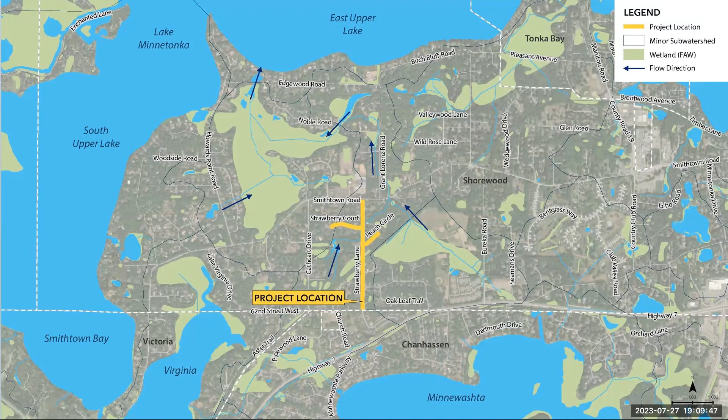The project itself is located within the city of Shorewood, and it extends south from West 62nd Street north to Smithtown Road, crossing the Lake Minnetonka Regional Trail at the approximate midpoint of the project. Project areas north of the trail are referred to as Strawberry Lane North, and areas south of the trail are referred to as Strawberry Lane South.

Drainage in the Strawberry Lane North area includes approximately 45 acres of land west of Strawberry Lane and north of the Lake Minnetonka Regional Trail. Within this area, there are two existing stormwater management facilities located on the west side of Strawberry Lane, on the northwest and southwest side of the intersection of Strawberry Court and Strawberry Lane. Water from this area drains to these basins, and from those ponds, water then discharges east via a 12-inch pipe into Pebble Creek.

During large storm events, runoff from this western watershed is reported to overtop the existing roadway. 12 homes within this area are reported to have less than 2 feet of freeboard during 100-year storm events, and 1 home is reported to have low openings at risk during 100-year storm events.

Drainage in the Strawberry Lane South area includes approximately 18.8 acres of land west of Strawberry Lane and south of the regional trail. Runoff from this area ultimately drains east via an 18-inch storm sewer, then drains north towards the Freeman Park area, which receives runoff from an additional 106 acres. It then discharges through an outlet control structure under the regional trail, where it ultimately discharges into the Freeman Channel towards the Grant Lorenz Channel, which runs in parallel with Grant Lorenz Road.

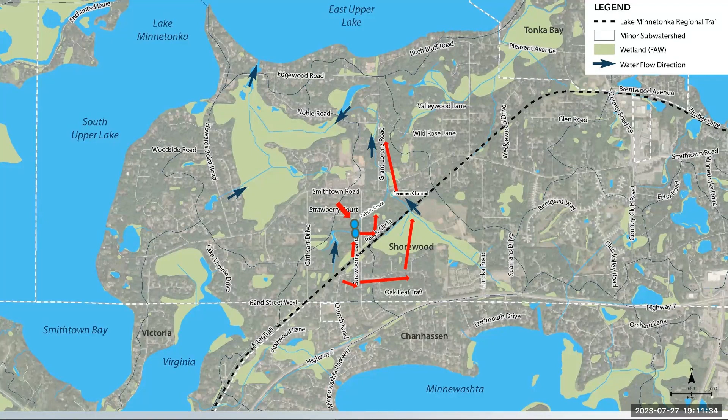The area then drains north in the channel along Grant Lorenz Road up to Noble Road. Severe erosion is seen along the channel, and the intersection of Grant Lorenz and Noble are temporarily inundated during 10 and 100-year events. Culvert damage is also seen at the road crossing.

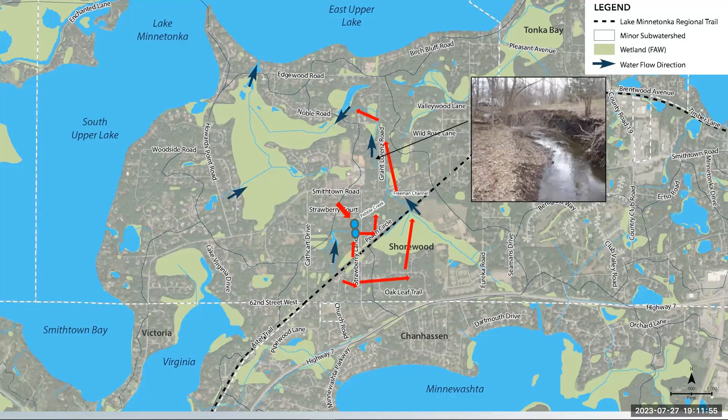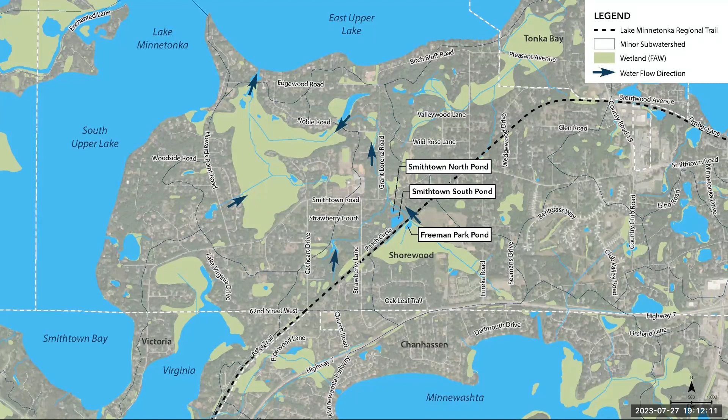To address these issues, Shorewood acquired land and built stormwater ponds to detain water and slow down rates. The Smithtown ponds were reviewed by the board on January 13th of 2021 and approved. The ponds have shown a reduction in rates for the Grant Lorenz Channel of nearly 40%.

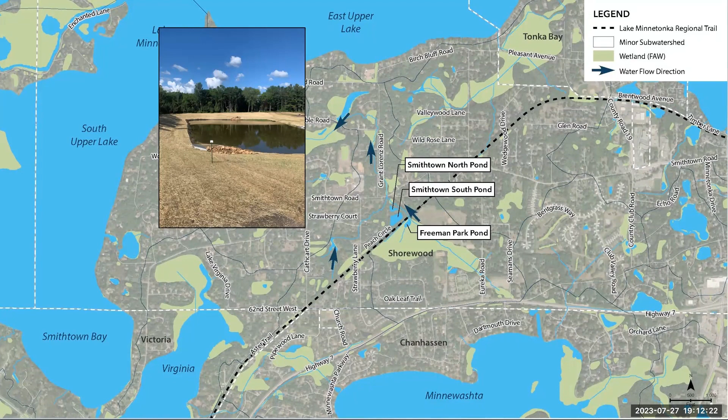The Freeman Park Basin has 2 outlets, one to the Freeman Channel and one to the Smithtown ponds that we can see here. This design ensures that any runoff producing an event smaller than a 2-year design storm maintains flow to Freeman Channel. Also, any runoff producing an event greater than a 2-year design storm ensures that Freeman Channel first receives the full 2-year flow, and then the overflow goes to the Smithtown Ponds for treatment.

This design maintains base flow and ecological function within an intermittent channel and reduces risk of damage both to property and ecological health by mitigating artificial high flows being transmitted downstream. So knowing the details of the Smithtown Ponds and the area's existing drainage patterns is important because this road reconstruction project is connecting to them to treat their stormwater runoff.

This road reconstruction project extends approximately 2,600 feet of Strawberry Lane between West 62nd Street and Smithtown Road and proposes to widen the road from 22 to 26 feet, add a 6-foot sidewalk on the east side of Strawberry Lane, install curb and gutter, and improve drainage in the corridor.

Peach Circle and Strawberry Court will also be reconstructed. The proposed roadway improvements will increase impervious surface by 0.7 acres. Water main improvements are also proposed. Existing water main in Strawberry Lane South will be reconstructed and new water main is proposed in Strawberry Lane North.

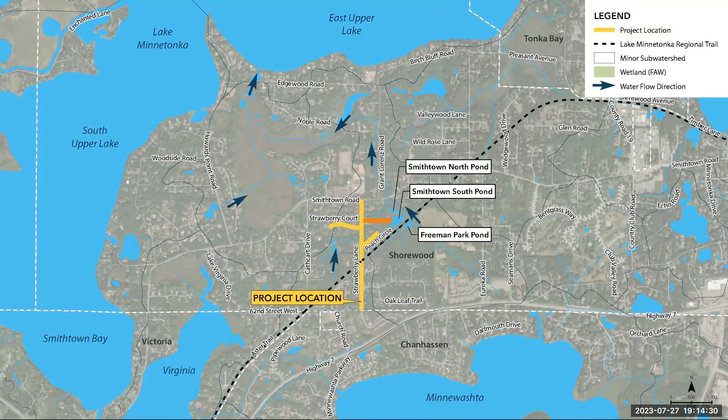So now that we've gone over the project's location within the district and the proposed development of the site, I'll review each of the district rules triggered and how the proposed project meets their requirements. Staff have reviewed the permit application and determined that the proposed project triggers the district's erosion control rule, stormwater management, water body crossings and structures, and stream bank stabilization rules. Each has been reviewed in accordance with the criteria of the rules.

First, erosion control. The district's erosion control rule applies to land disturbance of at least 5,000 square feet or excavation, fill, or stockpiling on site of at least 50 cubic yards of soil or earth material. The applicant is proposing 7.3 acres of disturbance and 7,126 cubic yards of excavation volume. Therefore, the rule is triggered.

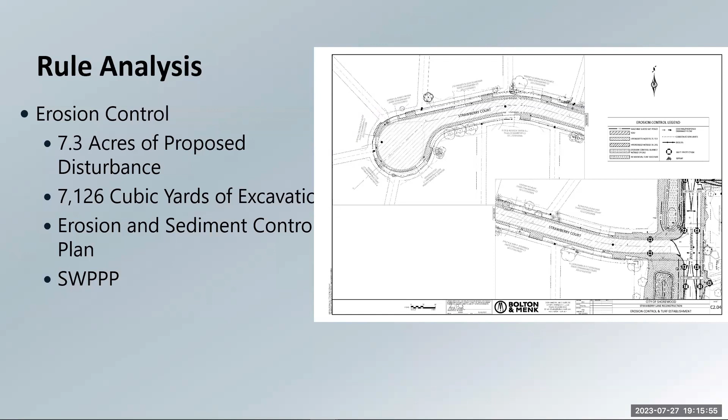Based on a request from the applicant, the district issued an erosion control permit for the demolition of the existing road on May 18th, 2023. The applicant met the intent and criteria of the erosion control rule by providing an erosion and sediment control plan and a stormwater pollution prevention plan that indicates best management practices. BMPs like perimeter control, rock construction entrances, and inlet protection are present around the project site, and staff find that the requirements of the erosion and sediment control rule have been met.

Now for the water body crossings and structures rule. This rule is applicable to projects that propose to place a road, utility, bridge, or associated structure in contact with the bed or bank of a water body, beneath the bed or bank of a water body, and includes the alteration of a water body to enclose it within a pipe.

Here in orange, again, we see the crossing for this project. The applicant's contractor has installed the 48-inch storm sewer between Strawberry Lane and Smithtown Ponds. Because this included a subsurface crossing of Pebble Creek, it required a water body crossings and structures permit, and so was not authorized under the issued erosion control permit. Therefore, after-the-fact approval is being sought as part of this application.

The conveyance as an element of stormwater treatment for a public road project meets the criteria of public benefit. Additionally, the road reconstruction will widen the road and add a sidewalk, improving safety and accessibility in the area. The pipe installation did not affect water quality, hydraulic capacity, or wildlife passage capabilities, and there is 3 feet of separation between the bottom of the bed and the top of the pipe, thus meeting the requirements of the rule.

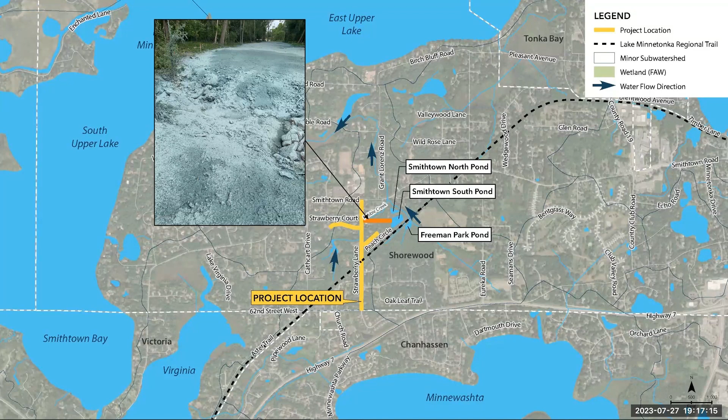Moving on to the shoreline and stream bank stabilization rule. This rule applies to projects that are proposing an improvement or alteration to the shoreline or stream bank. In addition to installing a pipe below the creek, the city is proposing improvements to the channel. This rule requires the applicant to assess the shear stress at that location and submit construction details for the disturbance, a stabilization plan, and a maintenance plan.

Shear stress calculations done by the applicant identified that this area is a low erosion intensity, which then requires that they use vegetative stabilization. In accordance with this section of the rule, the area will be stabilized with erosion control blanket and seeded with a native riparian mix that is commonly used for ecological restoration, meaning this rule is satisfied.

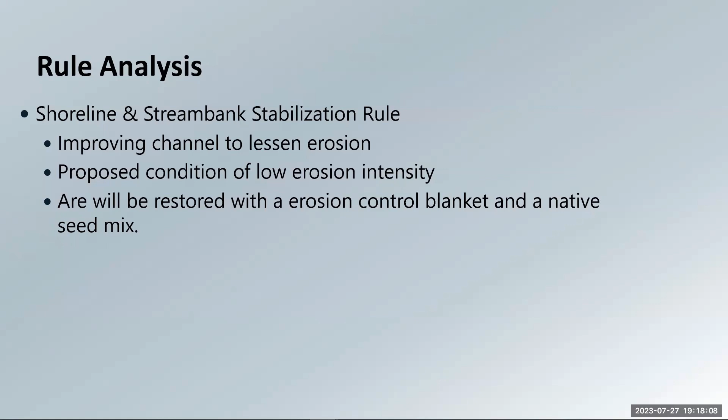Moving on to the stormwater management rule. This rule is applied to projects that propose to create or replace impervious surface and requires the applicants to submit a stormwater management plan for approval. Requirements are based on site size, percent site disturbance, and change in impervious cover.

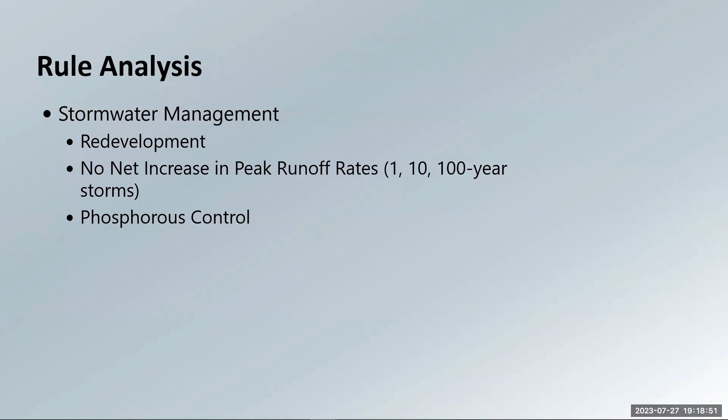The project proposes to reconstruct 2.8 acres of existing impervious surface and add 0.7 acres of new impervious surface, for a total impervious surface in the area of 3.5 acres. The project is defined as a linear reconstruction project that increases impervious surface between 10,000 square feet and 1 acre. Because of this, the project will require phosphorus and rate control for the additional impervious surface.

Labeled here, you can see the ponds that are proposed to treat the runoff from the Strawberry Lane project. To meet phosphorus control, existing and proposed runoff models were provided to the district for review. After analysis, it was determined that the post-construction condition will reduce phosphorus loading to Lake Minnetonka by 7.2 pounds per year, meeting the rule requirement of not increasing phosphorus loading downstream.

The rules also require that peak runoff rate for the 1, 10, and 100-year storm events may not increase at any point of discharge across the site boundary. As previously stated, the northern Strawberry Lane area will drain directly east to the Smithtown Ponds via pipe for treatment, and the southern Strawberry Lane area will drain northeast to the Freeman Pond. In both instances, the runoff is enclosed in a pipe as it leaves the site boundary on its way for treatment at the regional facility.

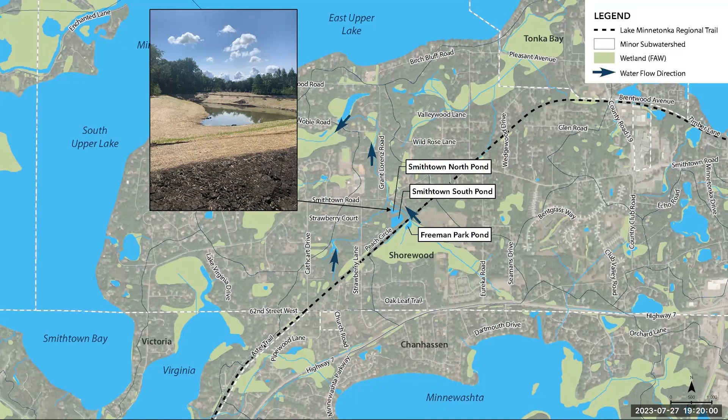The district engineer has reviewed the proposed plans, stormwater models, and stormwater calculations and determined that the project will not increase peak runoff rates during the 1, 10, and 100-year storm events. The project as proposed is in conformance with the requirements of the rule.

So now we've reviewed the geography of the project as well as the district rules that are triggered. In this next section of the presentation, I'll be providing an overview of Mr. Yelsey's concerns and speaking about the analysis that district staff and engineers have done to address those concerns.

Before you go in, how many pounds phosphorus? 7.2.

Mr. Yelsey's concerns can be broken down into 3 broad categories. First, the applicant's approach to project design relies heavily on models rather than utilizing field monitoring data. Second, the Smithtown ponds have damaged and will damage ecological integrity at a system scale by changing local hydrology due to diverting a portion of flows to Smithtown ponds. Lastly, he's expressed concern about insufficient erosion and sediment control measures on site.

District staff have conducted 4 site visits, met with Mr. Yelsey at his home, and walked the site with him in the city to understand and address his concerns. Following that, staff worked closely with the engineering team to review and address the concerns and offer the following with regards to the questions raised by Mr. Yelsey.

In response to his modeling concerns, there's extensive scientific research that provides literature values for modeling inputs, which have been validated and tested over time with monitoring data to ensure accuracy. Additionally, these models are widely used across the region and state, adhere to standard engineering principles, and are consistently accepted by public agencies to support the basis of project design and regulatory review.

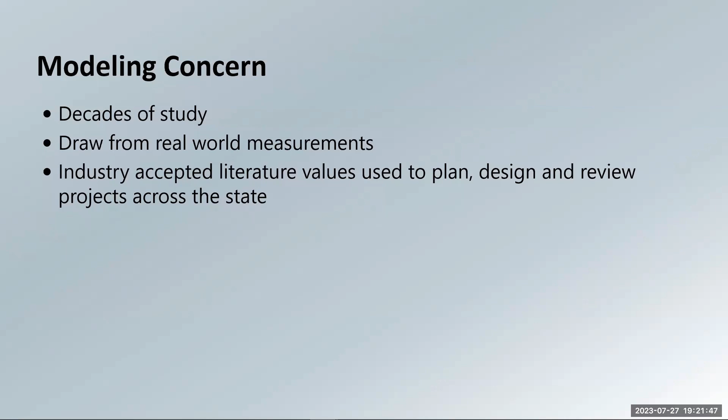Moving on to his broader concern on the ponds. As already briefly touched on, the Freeman Park has 2 outlets, one to Freeman Channel and one to the Smithtown Ponds. This design ensures that any runoff producing an event smaller than the 2-year design storm maintains flow to the Freeman Channel. Anything greater than that also provides flow to the Freeman Channel, but with just the excess going into the Smithtown Ponds for treatment.

The Smithtown Ponds and the Freeman Park Basin are wet detention basins, which include an added water quality component of an iron enhanced sand filter bench. The ponds will promote particulate settling, and the iron enhanced sand filter will capture both dissolved and particulate phosphorus load. The ponds are designed to slow flow of water through the system, which allows them to provide nutrient removals via settling and reduce peak discharge rates, in turn reducing the erosion potential within receiving waters. The ponds are not designed to remove volume.

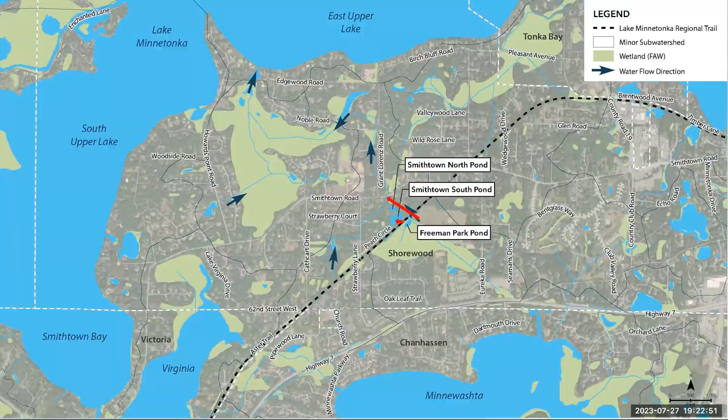Lastly, Mr. Yelsey had general concerns regarding the erosion and sediment control being used on site. District staff have conducted multiple inspections, including one involving the city staff and Mr. Yelsey. Overall, the site has followed best management practices for sediment and erosion control, and the city has responded to any necessary corrections identified by the MCWD. Generally, the site has had sufficient perimeter controls, inlet protection, a construction entrance, and has stabilized any large areas of exposed soils. There have been some instances where repairs have been requested, such as a down silt fence or other sediment controls, a lack of rock construction entrance, and insufficient ground stabilization, but the city has been quick to address any repairs or installations.

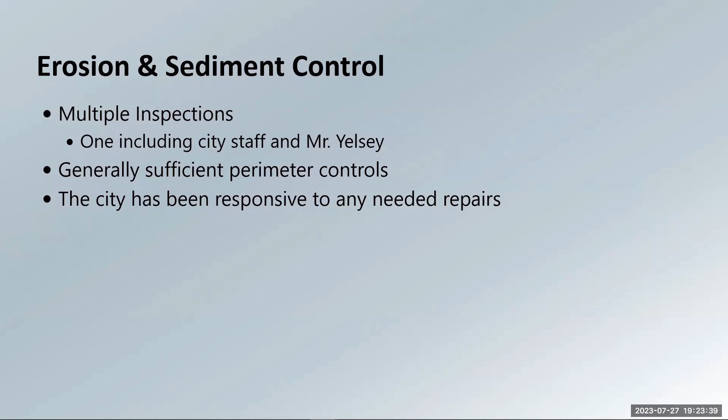In summary, this project triggers the erosion control, stormwater management, water body crossings and structures, and shoreline and stream stabilization rules. District staff, with the assistance of the district engineer, find that the proposed project with the recommended condition of pond permit issuance meets applicable requirements under these rules. Staff recommends approval of the permit application with the conditions listed at the beginning of the report. So thank you, President White and managers, for listening to this briefing on permit 22553 and the resident concerns.

Unless you have immediate questions for me, I will now turn it over to Mr. Yelsey to present briefly prior to discussion. Thank you. May come forward, Mr. Yelsey.

Welcome. Thank you. First, a couple points of order, just so I know what you expect from me. Do we have a time limit for me to talk? Yes, 5 to 10 minutes. All right. And are we able to talk to each other, or is it just a presentation? Make a presentation, and then during the board's deliberation you may ask questions.

All right. I've got 20-something slides and I can't possibly cover that in 10 minutes, but I will do something to make this work.

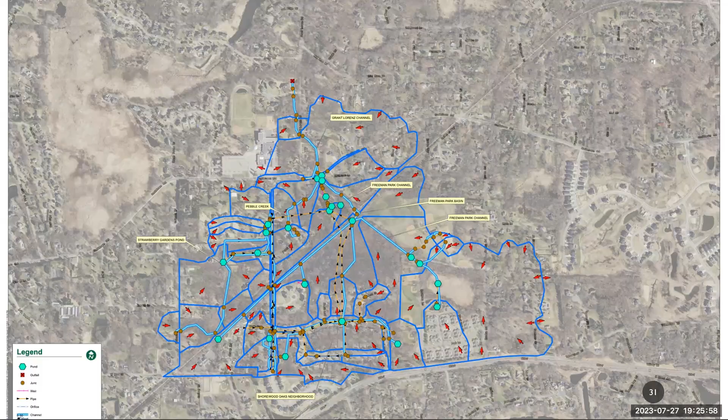You're supposed to be protecting the water resources of my area, which is a very large watershed that runs from Highway 7 all the way to Lake Minnetonka. It's interconnected, and it runs basically south to north, and it feeds the wetlands and the watershed area below Lake Minnetonka. For me, it's a precious one.

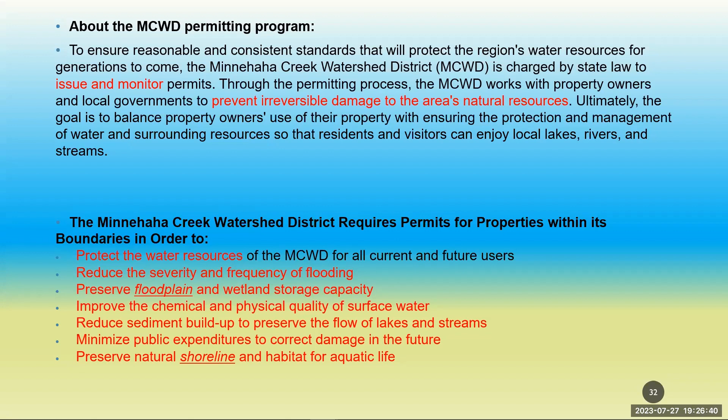I have lived in that area. I'm the only person who's watched that for 40 years. I've lived on both ends of that spectrum. I've lived right by Lake Minnetonka, and now I live upstream in the area near what's called Freeman Park, which is just the beginning of the Smithtown Ponds project. So I've had 40 years to witness this, and my comments are based on that.

Your principles — I'm looking for innovation, I'm looking for sound science, and I'm looking for measurement, which is part of sound science, and I'm looking for ecological integrity. So I believe the Strawberry Lane project that we're talking about, including my street, which is Peach Circle, is inextricably linked with the entire region. That entire area is one big interconnected watershed, and that watershed depends upon the flow of water from south to north in order to be healthy.

And it has, over the years, had systemic — I wouldn't call it flooding, but systemic flow in the spring that feeds the watershed and the wetlands just south of Lake Minnetonka. That's the way it has been for 40 years, and for me, that's the way it should be, because that's what that wetland requires, is that recharging. It's also a very low-lying area, flat, and it has quite a bit of a high water table as well.

So moving on, I don't believe any permit for this project should be allowed because of the reasons I'm going to give you, and I believe it should be delayed. I believe there's work to be done, and I believe there's credibility that needs to be established that has not been established for this project. It is not enough to simply get a permit.

You need to do the measurement, confirm that the submission information is accurate and correct and scientifically valid. And you need to also, if you're in the business of monitoring after issuing a permit, monitor to make sure everything's going the way you need to, and also have measures so you can tell whether something's going bad or something's going good. So none of these, not one of these measures, has been taken that I'm aware of directly by anybody.

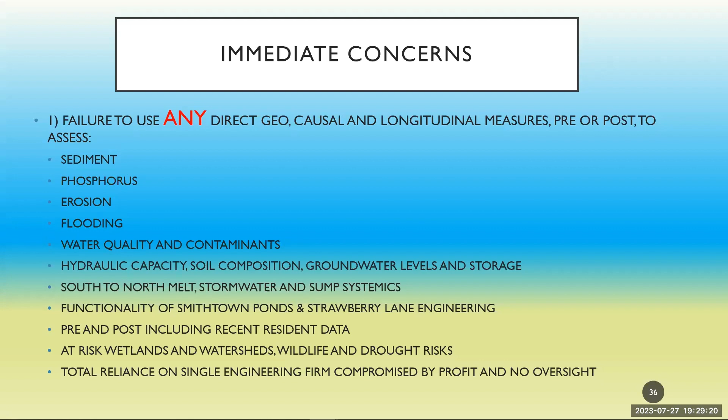And very quickly, my city is being run by a private engineering firm by and large, outside of the oversight primarily of the city, since they're running pretty much roughshod. It's as if we have a private developer doing all of this, with us having very little say and very little ability to have a voice in what's going on.

I got to keep moving. I'm going to run out of time.

Madam Chairman, can we make sure that he has enough time, because he's done quite a bit of work on this preparation of this report, and we don't have that many objections from the public to recommendations. So I think it'd be educational for the board to listen to this whole presentation.

I'm going to stick to the time that I gave, but by all means, ask questions during our discussion. Go ahead. So I'm going to use that as a comment then.

So the process of democracy in your institution, having been in one just like it, is suspect, because I could not receive the data I requested for this via electronic form with no cost. This is the data that should be posted on your website so I can access it when I need to, and not have to ask for it to come into your offices.

Everyone has been very polite, very professional. Your entire staff has been great. But this is about democracy.

You're limiting me, after how many hours of presentation on these projects, and here I am, the only voice speaking with firsthand knowledge, limited to 10 minutes. I believe that's anti-democratic, and since we're taking this audio tape, I will pass this on. My own town refuses to allow us to talk very long either. It's unfortunate that's the priority given to citizen voices.

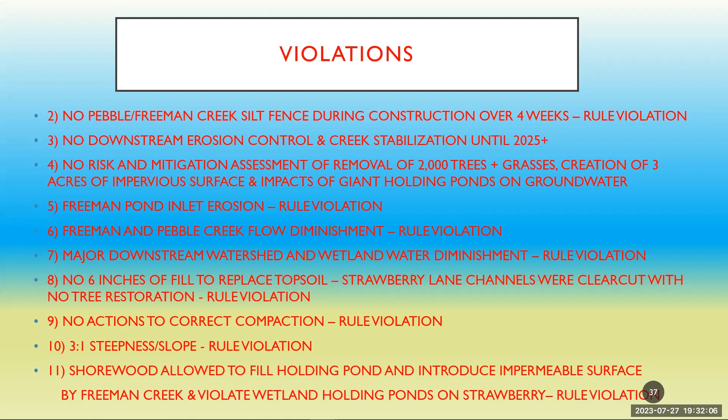There's an enormous number of permitting violations, in my view, in terms of scientific considerations, including no consideration for the removal of 2,000 trees and no restoration of 2,000 trees removed in this lowland area. They're just gone, and there's room to put them back. You're supposed to encourage restoration of properties and use natural structure, like trees and grasses, etc. None of that is happening, and I can't even go through it all.

So let me go on to the specific violations. Here are your specific rules, and I'm following them, reading them specifically. Everyone in red is a specific violation of your rules, where you're not doing something required by state law, or you're breaking one of your own rules. They're listed right here, and I'll show you pictures of some of these violations in a little while.

I encourage you to ask questions. If you want to understand these, I'm happy to present on every one. But the biggest issue is there's no measure of any of this. Has there been flooding in that area? No, there has not been documented long-term flooding except for spring melt, and that's only for a week or so, resolvable with local action.

There is no measure of sediment flow. There is no measure of erosion. There is not a major erosion issue. There has been no flooding issue on Strawberry Lane that I'm aware of, having lived there for 12 years and near it for 40 total years. None. This is a low-lying area, and pockets of heavy clay hold water on properties - that's not flooding. That's simply something resolvable by local landscaping.

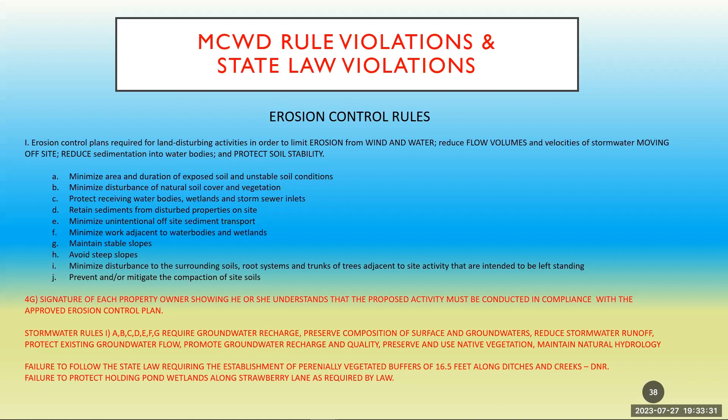Here are the bulk of the violations. We weren't asked for signatures, even though we are required to provide them for the Strawberry Lane project by your rules. Not all the interconnected water bodies here have been identified.

I can't go through them all again, I'm going to run out of time. But topsoil was removed, not replaced. There's compaction all over the place, not resolved the way your rules require. Slope length is greater than 3 by 1 in a variety of areas, which is going to allow erosion.

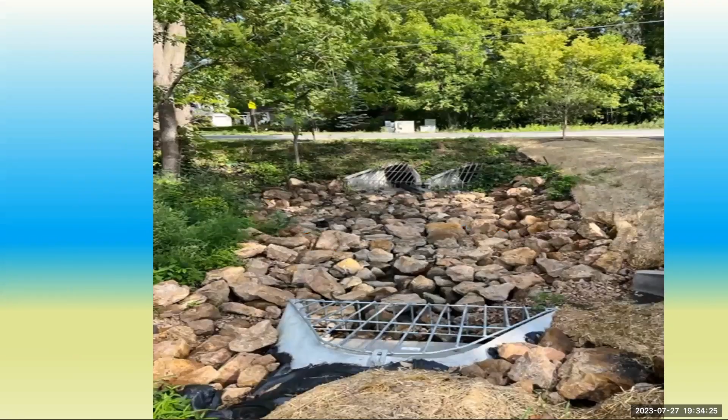So let's go to some pictures. This is the creek right now - nothing. It just rained, I took these pictures today and some others, and I went over there yesterday too. There is no water in that creek except for some standing water. It's not flowing. After a 1-inch rain, in my 40 years, the creek would have flowed past right my home. That's what happened for 40 years. It doesn't flow anymore because it's captured in the ponds and redirected.

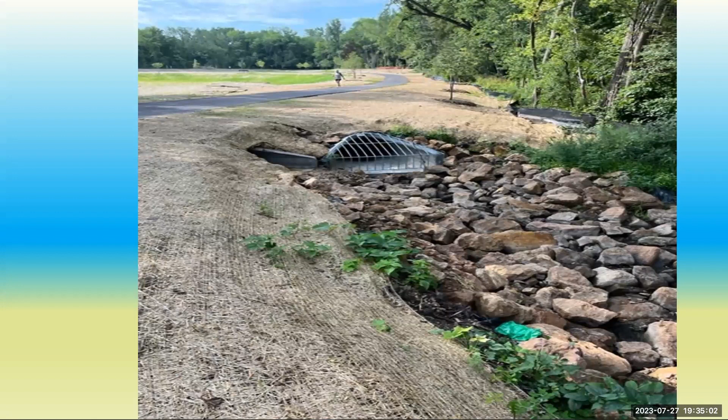Here's another picture from the other direction. In this picture you can see the compaction - all those areas have been compacted by a roadway. They haven't been fixed, they're not going to grow anything there. No one has restored it, even though your rules require it to be restored. You can see there's no erosion control there either, required by law for baffling, for example.

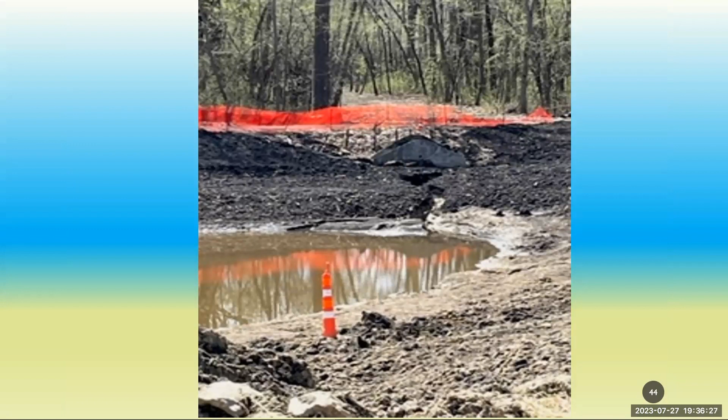Here's an earlier example of that same stream, and there's the erosion going into the pond, and that's with a free flow stream running during the spring. That breaks your rules right there. You shouldn't allow a feed into your stream to be full of soil and sediment. There should be baffling placed.

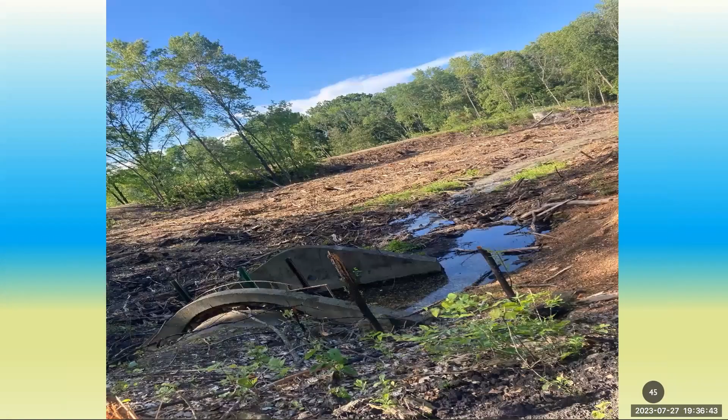Here's another example. That's the feed for the stream. No baffling, no protection whatsoever during construction, none.

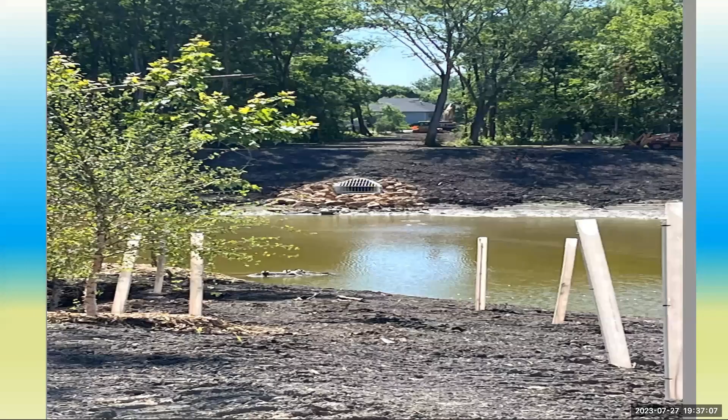This is the channel that runs from Strawberry Lane to Smithtown Ponds. They are interconnected in my view. They can't be separated. You can see that they're interconnected and should be considered as a whole when you're looking at the vitality of the region. There's an alligator in that pond already.

Do you see it? No, that was a joke.

No alligator. But that entire ecosystem there has been taken out, being replaced maybe with some grasses, but that's in violation. That is not being restored. This is a wetland. Those trees, the 2,000 that were removed, need to be replaced so that we have more absorption capability.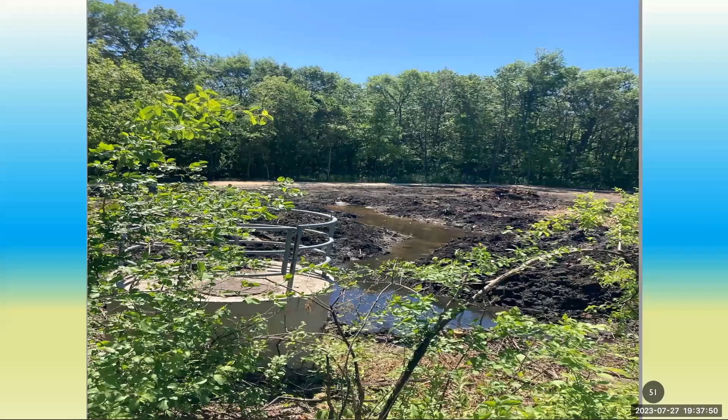Again, more unbaffled erosion right in the creek that's running during the spring. And then here's the creek running. There's a home right by it that's too close. There's gasoline and whatever from the driveway feeding into that stream, and it's unbaffled at that time.

It has since been baffled on one side at least, maybe the other. I haven't been there to see. So I'm going to stop there. I think I've probably run out of time.

Some conclusionary, wrap it up, that's fine. Sure.

What I would say is that there is no solid foundation for the scale of these projects and the fact that they are going to be successful in nurturing the wetlands and watershed, which is your job. So there is no evidence that they're working at this time for the ponds. There's evidence that I presented to you that they're not working and they're actually cutting off the essential flow of water from south to north into this wetland.

They're not properly adjusted, but we have no evidence. And so for you, you can issue a permit if you feel you have to, but if you don't monitor it and have measures, you're not able to do the scientific evaluation to see if indeed you've done something good or bad for the entire vast wetland. And my theory is that we've done something very bad that is unnecessary and harmful.

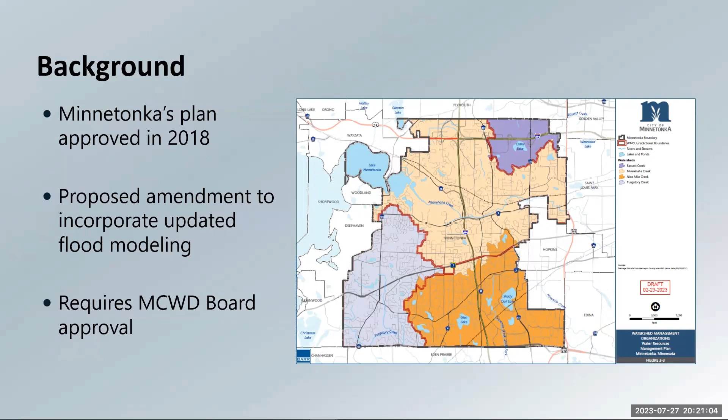In terms of the scope of the changes, they are generally limited to incorporating the new model data and outputs, including revised flood elevations. The city is not proposing changes to its capital improvement program as part of this amendment. And one of the next steps that they've outlined is that they will be developing a flood mitigation prioritization strategy that would then inform future updates to its capital improvement plan in its next plan update.

And so in terms of staff's review, we've verified that the plan meets all of the requirements, and really focused the review on just trying to understand potential for downstream impacts as the city looks to address flood issues within their boundaries, and as cities across the district try to manage increasing precipitation with climate change. We know there's potential for flood risk to be transferred downstream. And obviously, we're undertaking a 2D model build to get a better understanding of the cumulative impacts of these types of changes so that we can better understand how to manage them.

And our approach really has been to work cooperatively with the cities to try to understand what they're seeing, what their models are showing, and how they're approaching these changes, so that we can be a partner collaborating on the front end to understand it at a system level rather than trying to address it when it comes through for a permit.

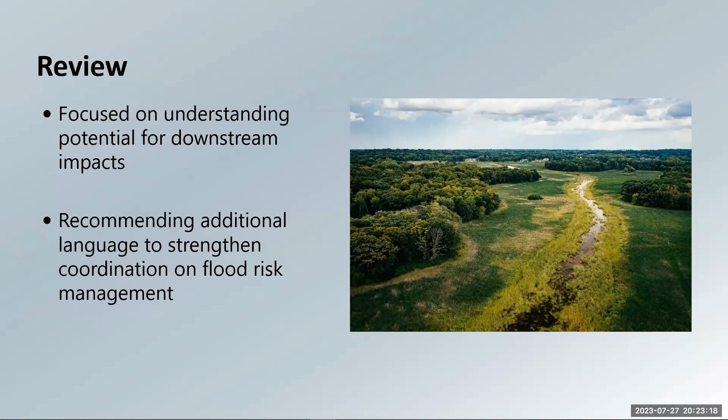And so the board may recall an amendment that came through for Edina, I believe was approved in December, where the city had also updated its modeling, gone through a prioritization strategy, and was actually implementing or incorporating new projects into their plan. And so we had some good discussion there with the city and ultimately asked them to make some additions in their plan to just acknowledge the potential for risk and our interest in working collaboratively to address those. And so I think, now seeing a similar approach here with the city, granted, they're not quite as far along and are still going to be taking those next steps to prioritize and implement new projects. But nevertheless, we view this as an opportunity to just open up those conversations with the city, and view this as a good opportunity just to acknowledge in the plan our potential concerns and desire to work collaboratively to understand potential for risks and work on those at both a system scale and a project scale.

So staff has proposed some additional language that could be incorporated into the plan. And the city has been supportive of that and is willing to finalize that language and get that incorporated.

And generally, it would involve just acknowledging potential for downstream impacts and then expressing a commitment to work with the districts as they develop their flood mitigation prioritization strategy, as well as on a project specific basis as they look to advance projects that have potential for downstream impact, as well as in advising and engaging with us as we develop our 2D model and identify any potential regional opportunities that we might want to pursue with the city.

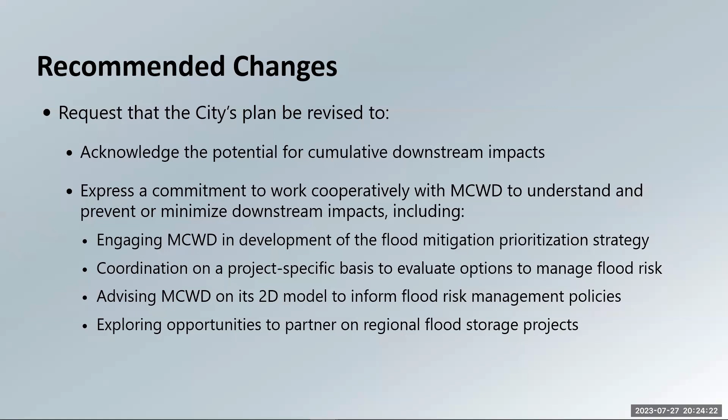So as I mentioned, the city is comfortable with those recommendations. And so the request tonight is for the board to approve the city's amended plan, conditioned on submittal of a final version that would incorporate the additional language. I can take any questions.

Thank you very much. Is there a motion to adopt the resolution? Andrew Miller. Is there a second? Second. Manager Sando, any questions for Ms. Christopher? Then voting on this, all those in favor, please say aye. Aye. Any opposed? Thank you.

We are now moving to a presentation, 325 Blake Road Master Development, Mr. Hayman.

Good evening, Chair White, managers. I just want to give a quick introduction for item 12.1. Our master development partner, Alatus, Bob Lux and Erica Miller are with us this evening. As noted in your packet, we've been working with Alatus since selection of them as our master development partner in June of 2021. From the design charrettes through the preliminary development agreement, I've been working closely to integrate the natural systems and regional stormwater with the master development itself. That vision was memorialized in our purchase and sale agreement in 2022 and is what we've been working towards with Alatus since then.

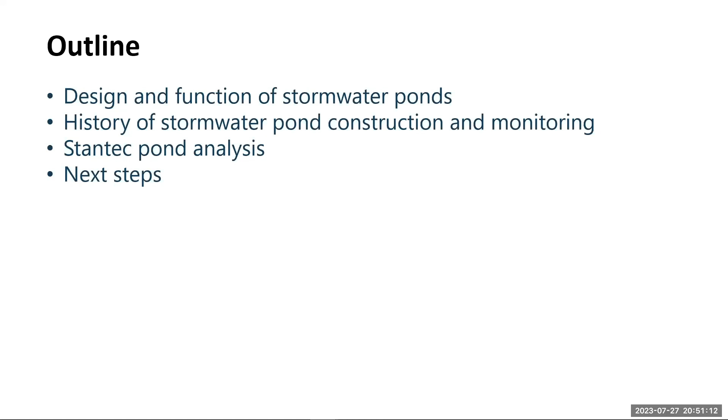Let's start with an overview of stormwater ponds and what they do. Why do we build stormwater ponds? Ponds provide a number of ecological services, including flood control, rate control, nutrient removal, and sediment retention, which will be the focus of the analysis this evening.

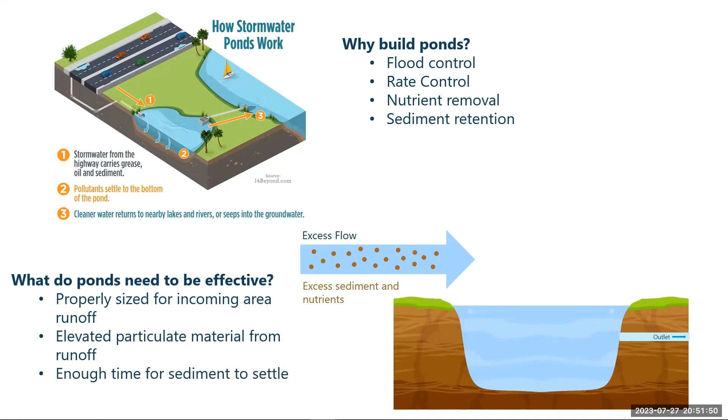What do ponds need to be effective? First, they must be properly sized for incoming area runoff. They require elevated particulate material from that runoff and enough retention time for those sediments to settle. Looking at the diagram here, as excess flow from the pond system enters the stormwater pond, it brings with it excess sediment and nutrients. These then settle to the bottom of the pond, and over time it fills the volume of the pond in. Then, after the sediment has settled out, the water leaves the pond cleaner.

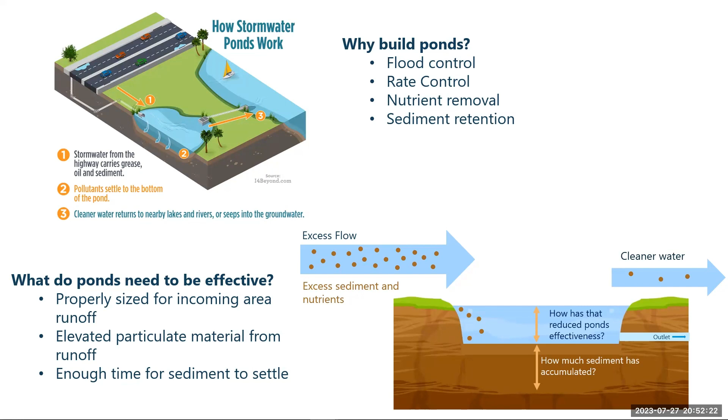And the questions we ask are: how much sediment has accumulated over time, and how has this reduced the pond's effectiveness? So we'll look at all the ponds that the district has constructed to see how we find answers to those questions.

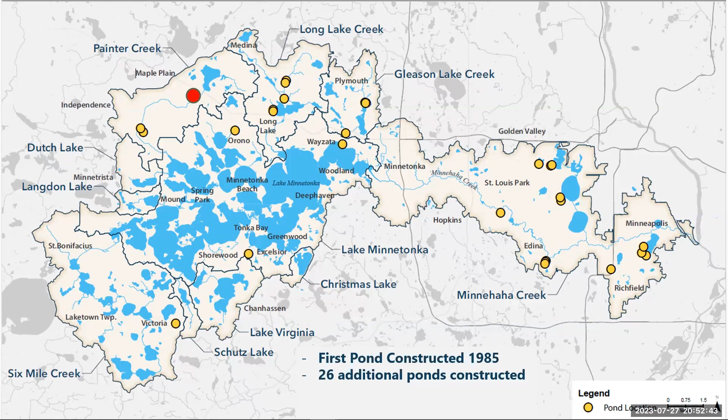Now, what do we do with all these ponds that we build? Well, with the adoption of the 2010 work plan and budget for operations and maintenance, the board established a policy to study 6 to 11 ponds per year on a 3-year rotating basis. This amounts to 94 surveys since 2010, with each pond being surveyed 3 to 4 times over the past 13 years. So all of that collected data allowed us to answer questions about our ponds.

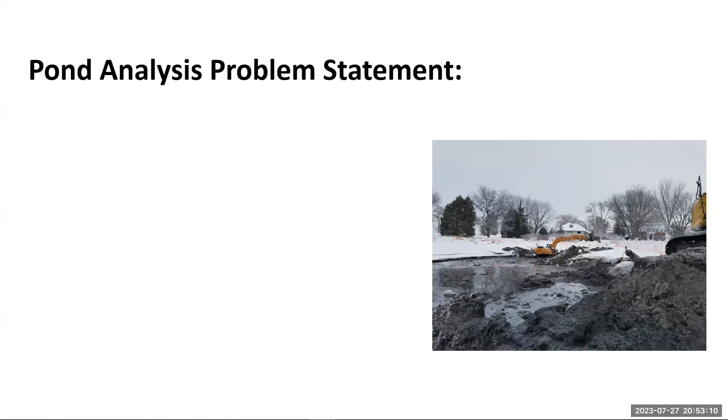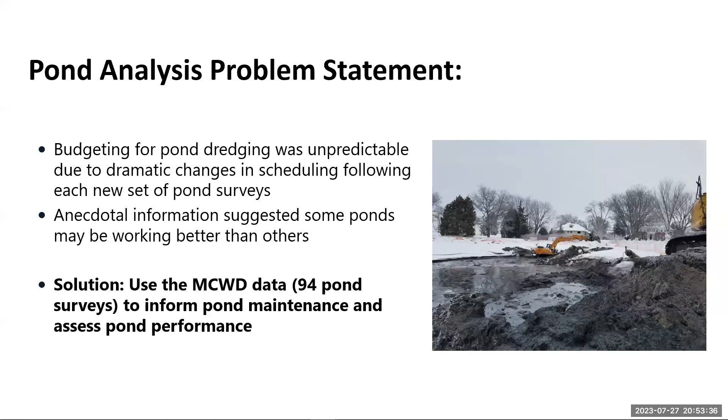Problem statement: budgeting for pond dredging was unpredictable due to dramatic changes in scheduling following each new set of pond surveys that was being conducted. Anecdotal information suggested that some ponds may be working better than others. As a solution, we used the district data, those 94 pond surveys, to inform pond maintenance and assess pond performance. In July of 2022, the board entered into a contract with Stantec to address these issues.

The contract with Stantec was broken into 3 tasks, which we'll go over. The first was the pond data review, to compile and analyze 13 years of survey and dredging data. Next, the pond inventory and maintenance planning, to develop asset management for performing ponds, a survey and dredging schedule and budget with a 20-year outlook. Third, to identify pond retrofit opportunities, developing these while considering the climate action framework.

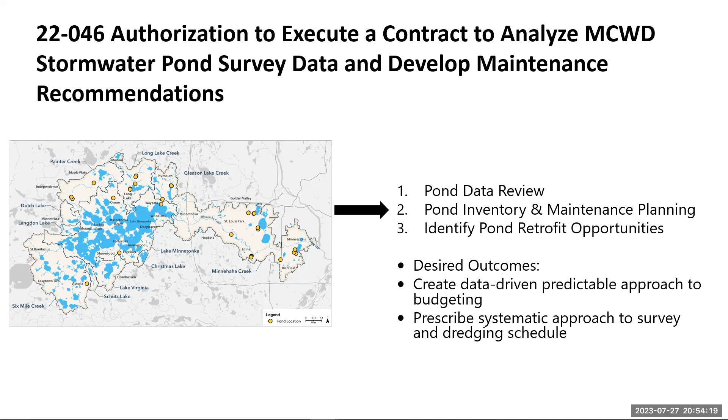The desired outcomes of this analysis were to create a data-driven and predictable approach to budgeting and prescribe a systematic approach to the survey and dredging schedule. Now I'll take a detailed look at each of the 3 tasks in the analysis.

Task 1 is the pond data review. For each pond reviewed, a sedimentation history was compiled, shown by the blue bars on the chart. Dredging history was also reviewed, shown by the orange bars on the chart, signifying the volume of material removed during the dredging event, with the dredging event marked by a red X. That analysis allowed for the calculation of a sediment accumulation rate for each pond and was used to develop a long-term pond maintenance schedule and survey and dredging cost estimates.

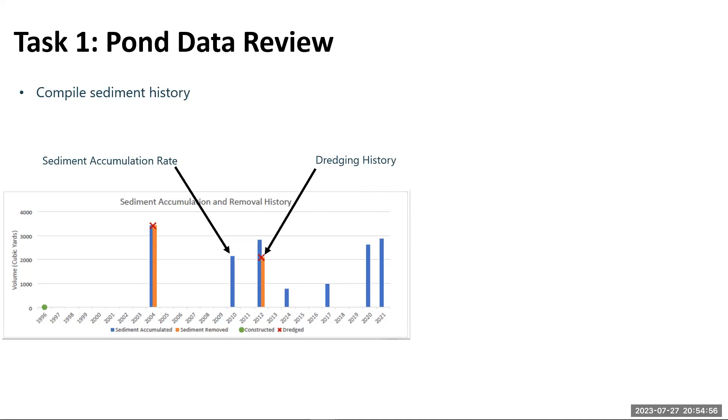This was then collected into a pond data sheet for each pond, which you saw in the packet, showing build specifications with an aerial photo and a narrative of the design intent, with a drainage area map to be added in the future for the gray box on the sheet. This serves as a quick reference guide for each pond and features visually accessible data, as you see in the chart. More importantly, this is an editable document to track all future surveys and dredging events to help further refine efficiency in budgeting and scheduling.

The parameters to inform the specific data collection will be included in all future surveys to effectively continue the data set. We'll zoom in on some of the status and recommendations as we continue to task 2.

So for each pond, the collected data, yes, of course, Manager Miller. This is, you've done a survey of the maintenance needs.

And the one question I have, does it include a survey of the performance versus the plan? I mean, I was surprised that one of the Cedar Lake ponds doesn't work. And logic would tell me it should be just phenomenal. What have we learned from that? Let's call it a failure for future ponds. So thank you, President White, Board of Managers.

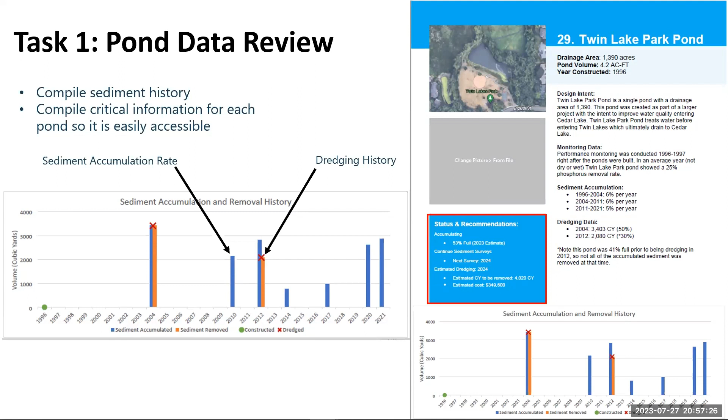The focus of this study was to determine which ponds are accumulating as we would expect them to be. The ponds are built off of engineering assumptions, and for each style of pond that's built, there's an expected accumulation rate. So what we were looking to do with this phase of the analysis was determine which ponds were accumulating within that expected rate and which were not. We'll talk about next steps a bit later, but we're going to have to look at it on a case-by-case basis once we determine something's outside of the expected parameters.

So for each pond, the collected data was analyzed for numerous metrics, some highlighted here. The most recent percentage of volume filled with sediment informs the survey schedule and subsequently the dredging schedule.

This analysis allowed for the calculation of a sediment accumulation rate for each pond. The calculation of this rate allowed for the creation of a methodical process for survey and dredging schedules for the next 20 years, including budget estimates.

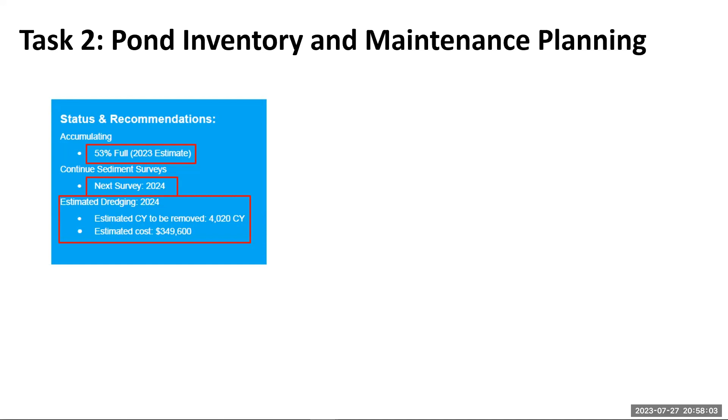Our previous process involved surveying 6 to 11 ponds per year and using that data to inform which ponds to dredge. Now, long-term data analysis allows for a reference database. We're no longer guessing. We only survey ponds scheduled for dredging, providing annual cost savings due to predictive budgeting, staff workload allocation, and reduced engineering contracting.

Over the course of the 6 years listed, with the old method, we would have surveyed 6 to 11 ponds each year at an approximate cost of $2,000 per survey, completing between 36 and 66 surveys over this period for a total cost of between $72,000 and $132,000.

With our new data-driven schedule, we'll survey only 12 ponds in the next 6 years for a total cost of approximately $24,000, an estimated cost savings of between $48,000 and $108,000 on our survey scheduling.

All of this information is enshrined in a detailed technical data tracking spreadsheet, which will be used to continuously update and evaluate the data to inform scheduling and programming decisions. As the data set grows, we'll continue to refine and improve the survey, engineering, and dredging schedules, further increasing the efficiency of our program.

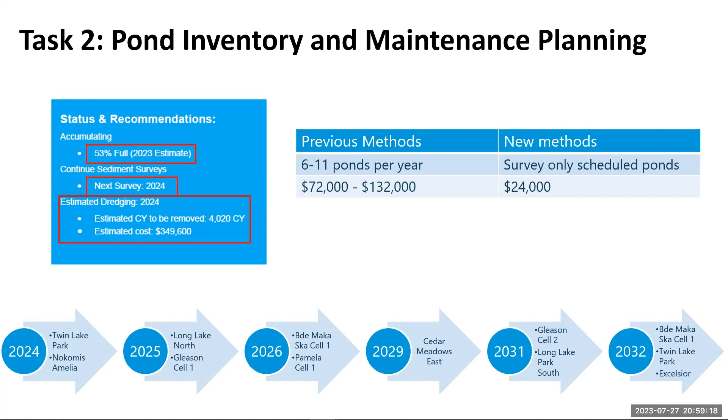Task 3 provided a high-level overview of pond retrofit options. A table was developed showing a variety of enhancement possibilities, including pre-treatment filters, pond expansion, and in-pond infrastructure, including baffles and vegetation. These possible retrofit or enhancement opportunities were identified for specific ponds based on location and design parameters.

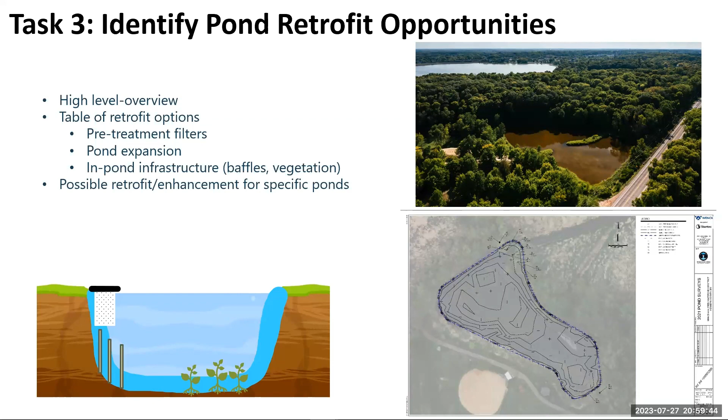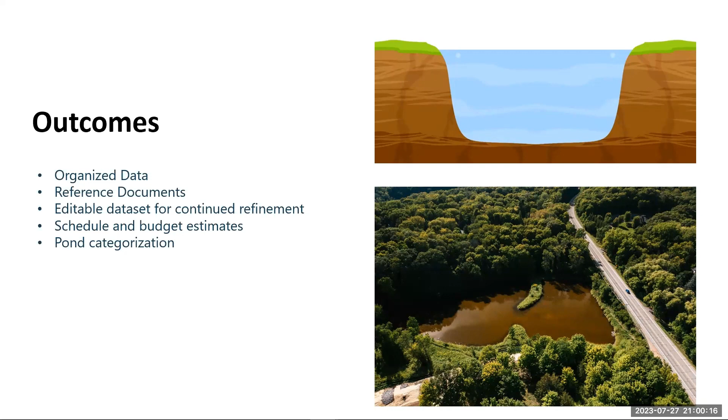So what were the outcomes of our analysis? All of the data we had is now in one place and organized, with easily referenced documents that are visually accessible and editable to input new information and further adapt and improve metrics. We have a schedule and budget estimates created for both surveying and dredging to streamline the program going forward. And we learned that not all ponds accumulating are accumulating as expected, and we need further data to investigate, which leads us to our next steps.

So we need to analyze the categorization of our ponds. Ponds found to be under and non-accumulating were built to a specific set of engineering assumptions, and we now know which ponds fall outside of those assumptions. Additional monitoring and review will be required to better understand the performance of these ponds. Examples include water quality monitoring, review of pipe networks to determine sediment loads within pipes, identification of locations expected as major contributors to sediment load, and understanding why that sediment is not reaching or settling in the ponds.

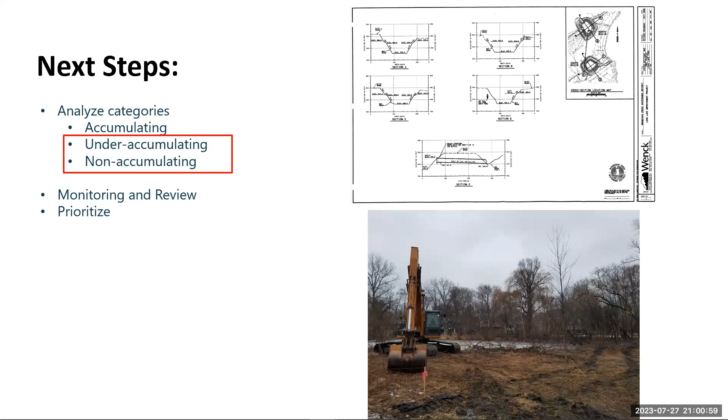So focusing on ponds within priority watersheds may be a constructive way for us to focus data collection moving forward. So I'd like to move into discussion. The purpose of this work was to define a predictable maintenance schedule. Is it clear how this benefits the program? Are there data or understanding gaps you may have, or questions on how we'll implement this into the program? So thank you.

Questions? Very interesting, very good information. Thanks so much. Never thought I'd get excited about pond dredging. Thank you, Manager. So refreshing and concrete after the other topic.

Scientific data, I guess. No room for guessing. I looked at these and saw the green ones in our drawing. The green ponds are accumulating as we expected. Those marked in yellow are accumulating sediment, but slightly under their design parameters.

What we determined to be under accumulating was within half a percentage point of the low end of the accumulating range. And then there are ponds that are non-accumulating at this time. That's what I was referring to - I said green and then red.

If we take a not accumulating pond, yet water's still draining into them, how do they not accumulate? Let me take a step back - your question was, are they doing nothing? The answer is no, because as we talked about at the beginning of the presentation, stormwater ponds serve a variety of purposes, one of which is flood control, rate control.

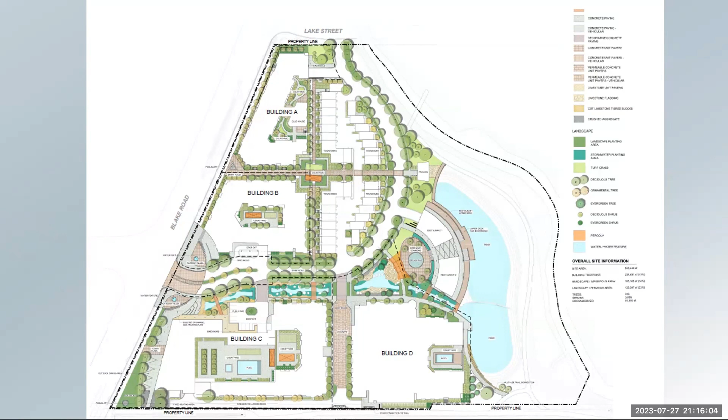So I already walked through this. Building A is under construction, with the remainder then being what is developable and what would be taken down over phase 1B and phase 2.

Just to remind the board, we have the 1-year expiration date from the date of execution of the purchase and sale agreement, which arrived in May. They did extend under the first extension, which expires in about a week and a half. So they will need to extend again, which Alatus indicated tonight they would be. That would give them into November.

One other thing to note is that under the current purchase and sale agreement, from the time of the last extension, they do have a 90-day to close window. That's important too, because if they extend for another 90 days and then are ready to close within the next 90, they wouldn't require another extension. We may talk a little about how that impacts our thoughts on the purchase and sale agreement and any modifications to that.

So really the date we're dealing with is August 7th, although now they've indicated they will extend. But there are additional considerations for the board and some elements to their proposal, as well as what we discussed at our last meeting. So to consider those, I'll turn it over to legal counsel, who suggested the board would enter closed session to explore those options regarding this particular negotiation. And as I noted, we do have some of our development advisors on hand as well.

Thank you, Mr. Smith. Would you state the reason? Madam President, it'd be appropriate to have a board motion to go to closed session for the purpose of discussing a change in the terms of the sale agreement for 325 Blake Road in Hopkins. Is there a motion? Manager Olson moves, Manager Miller seconds. Those in favor say aye. Any opposed? We are in closed session.